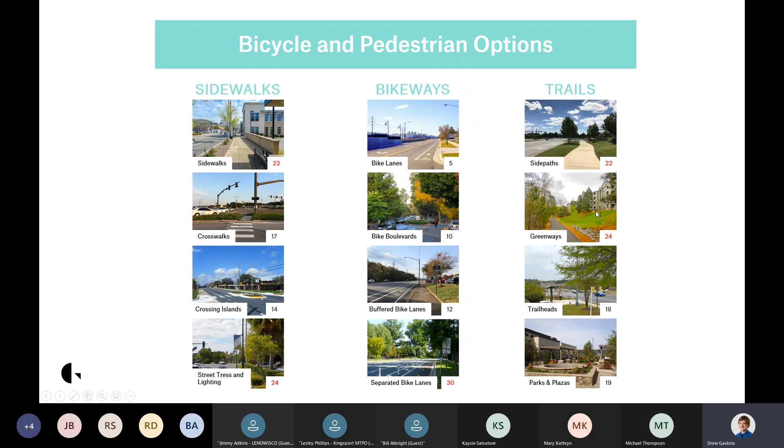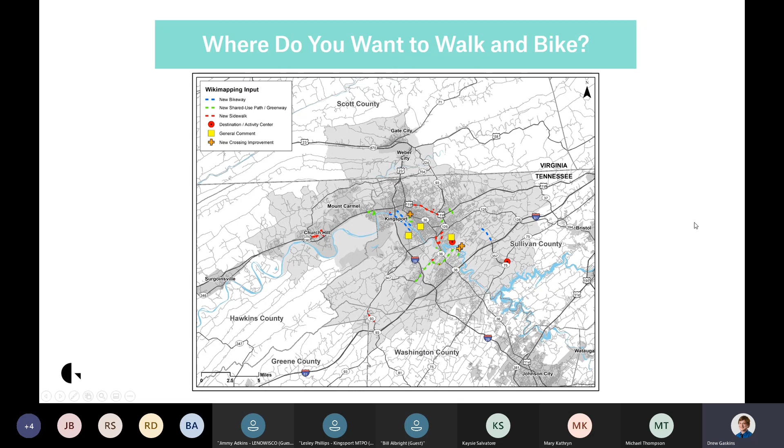And thank you so much if you got on the interactive map. If you didn't get the opportunity to do that in the first round, you still have the chance here. I'll get to that at the end of the presentation. Finally, that third question: key factors in transportation choice.

We got a lot of open-ended responses, really about a good Word document page's worth. So rather than going through those individually, we created a quick word cloud.

But to summarize generally, the four themes we saw were safety and accessibility, with people wanting to feel safe walking or bicycling, particularly along some of the major corridors.

Distance and comfort came up a lot. Again, people indicated they were more comfortable for those short trips, or would be more comfortable, if they had facilities available to them.

Connectivity, which was that new point of emphasis for the plan. And then I added a fourth theme, network continuity, which came up a lot but isn't captured as well in the word cloud, probably because people didn't use the word 'gap' much - talking about gaps in the network and the frustration they encounter when there's a small link in their trip that just isn't comfortable for them.

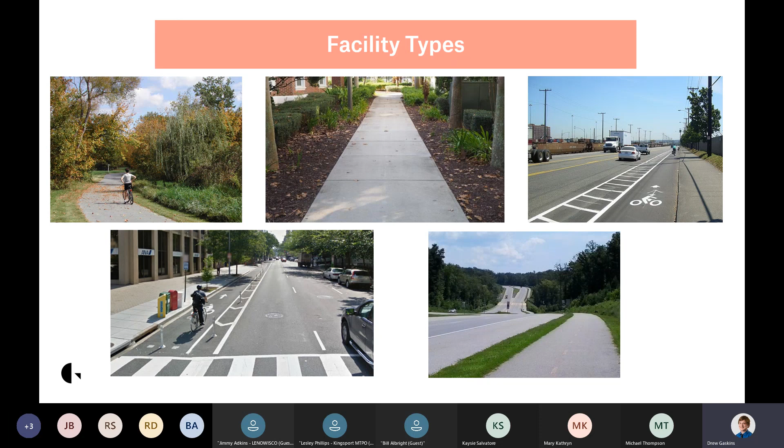But before I go over those networks, I did want to briefly touch on some of the facility types that we discuss, and you see some images here of what those are. In terms of dimensions, some of the categories we have are...

Shared use path and side path is one of our categories. A lot of times these are also called greenways, so this is what you'd associate with the Greenbelt, for example. The shared use path is a 10-foot path, completely separated from any type of vehicular traffic, really what we'd consider a classic greenway. On the right, a side path is essentially a greenway or shared use path that runs parallel to the road, providing a lot of separation from traffic as well. Based on my experience at Kingsport, I know there are some segments of the Greenbelt oriented that way, but that's what we mean by shared use path or side path.

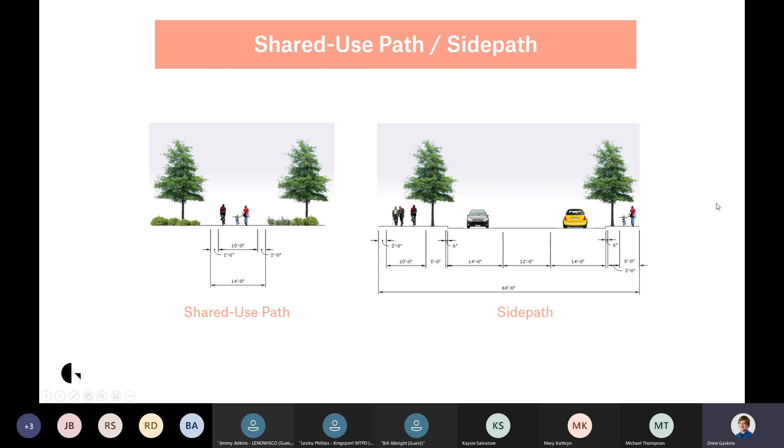Bike lanes, when you review the draft recommendations, currently just show up as a singular category. There are various configurations of bike lanes, and we expect to provide a little more specificity on those recommendations once we wrap up our look at feasibility.

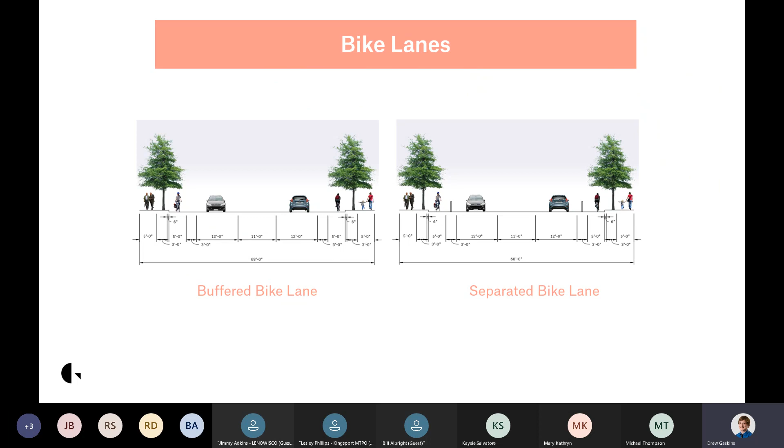Some other configurations that are a little more comfortable and provide more separation from traffic, which we showed in the survey, are the buffered bike lane. In this case, you've got your 5-foot bike lane, but with a 3-foot separation from traffic. Oftentimes that separation will just be pavement markings indicating that it's not an area for cars—it's not a travel lane, it's a buffer zone.

Separated bike lanes are essentially buffered bike lanes—you'll notice the little vertical separator in the figure. This is often accomplished using plastic bollards or anything to provide that psychological and physical separation from traffic.

Finally, at least in Tennessee, a less common but also widely used configuration is this separated bike lane, also known as a cycle track. In this case, you'd have two-way bicycle traffic on a single side of the street with some type of separation from traffic. So those are some of the various bike lane configurations that could be expected.

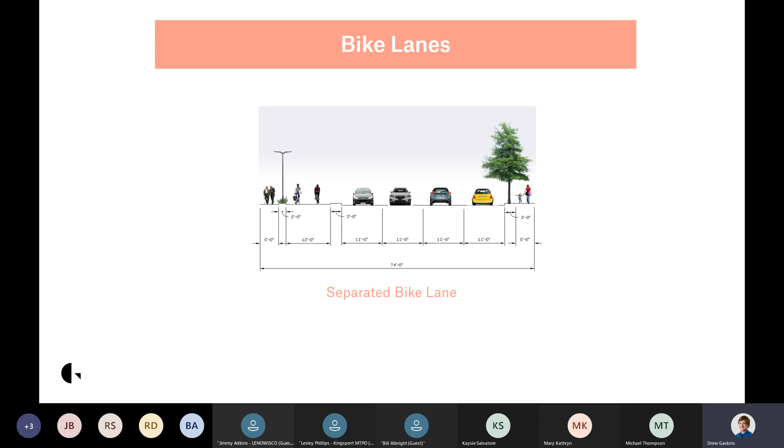We will identify areas where we think buffered or separated bike lanes could be appropriate. Those final decisions for facility types, though, would ultimately be made in the design process, once you've got an engineering level analysis of constraints on a specific roadway or project.

Another type of facility you'll see are paved shoulders—in this case, just a 6-foot paved shoulder. These facilities tend to be more appropriate and cost effective in more rural environments. So when we get to the network recommendations, you'll notice that in some cases we do transition out to paved shoulders as we get into more rural areas with much longer distances between origins and destinations.

And then finally, we do have some shared lane facilities as well. When we're talking about all ages and abilities facilities, shared lanes tend to be a choice of last resort, just because it means bicycles are going to be sharing the pavement with cars.

We want to emphasize that shared lanes aren't necessarily the classic Sharrow painting on the pavement. There are various treatments you can include, most of them traffic calming in nature. In neighborhood contexts, things like traffic circles, curb extensions, and bulb outs, which also work great in more urban contexts. Speed tables or cushions, I know those aren't always popular, but in certain contexts they can be effective. And of course your classic shared lane markings and signage, which when implemented aggressively and appropriately can help. These are some of the treatments that could be included on shared lane projects.

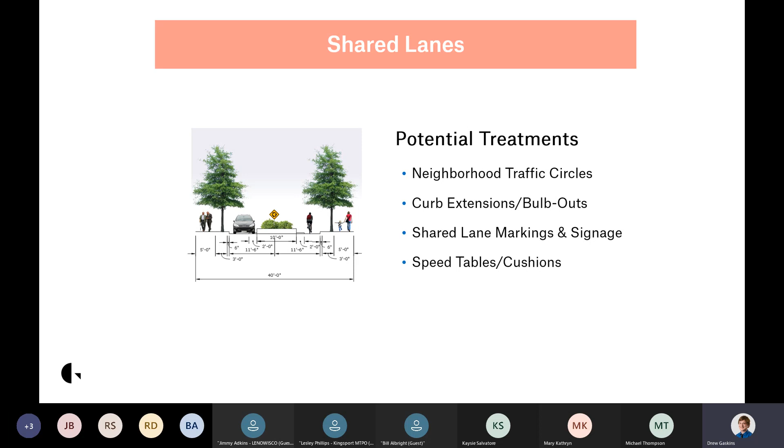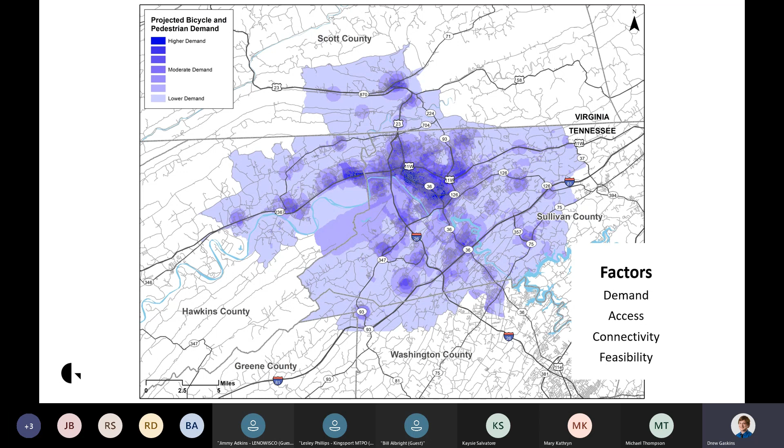Now that I've introduced the facility types, how did we develop the network updates? The factors that went into that were demand, access, trying to make sure these are accessible facilities close to where people would be able to get on them, and connectivity, which was a major point of emphasis in the plan. The last factor, which we're still wrapping up, is feasibility, making sure we're not presenting the MTPO with pie in the sky ideas that have no chance of actually being implemented. We want the recommendations to be realistic and implementable, with reasonable cost given the constraints.

To underscore the development of the draft bikeway network, we started, as I mentioned earlier, with the 2012 network from the 2012 plan. Many of those projects have been implemented, some have not, but that was really our starting point.

From there we went to the online interactive map and started layering on recommendations for this planning effort. We also built upon and leveraged the Greenbelt expansion recommendations identified in the Parks and Recreation master plan that the city of Kingsport recently presented. Anywhere we publish these recommendations, whether in this presentation, the online interactive map, or the final plan document, we'll make a distinction between our 2021 recommendations and those Parks and Recreation recommendations, and I'll show you what that looks like.

So again, we started with existing facilities, including a few implemented from the 2012 plan, then layered on updated recommendations that we've developed. Some of these are from the 2012 plan carried forward, and in other cases we extended or otherwise modified them.

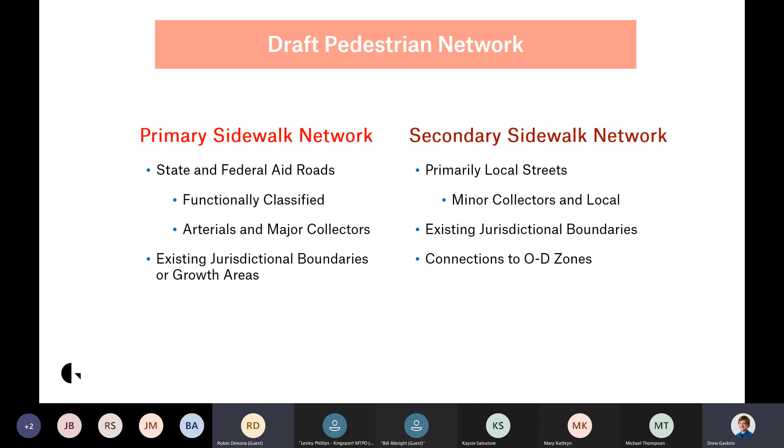Again, in terms of performance, pedestrian level of traffic stress, same deal. This is how fast your heart's beating when you're walking along some of these corridors. Pedestrian LTS tends to track very closely with whether or not there are sidewalks at all.

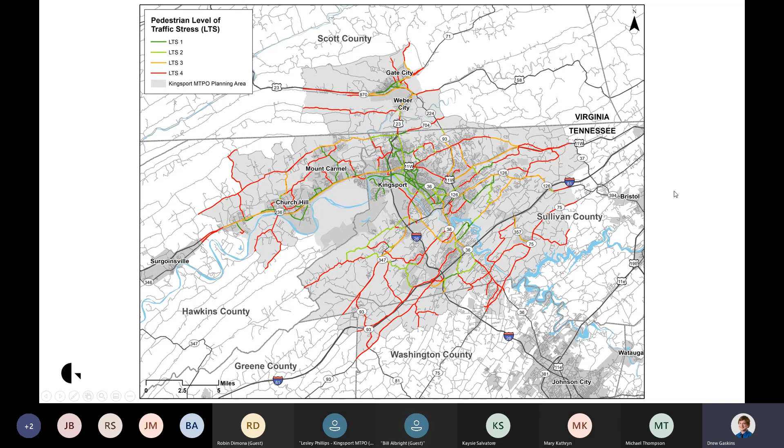All right, well, I guess that's a good segue into talking about ways that the public can get involved. So if there are questions or comments or thoughts that come up later, we do have a couple of different ways for you to get that information to us at a later time.

So you can zoom in - I know a lot of times people have specific areas of focus they want to look at. You can zoom into your neighborhood or near the school your child attends and take a look, and provide either linear or point comments for us. So jump on there even today, do it as soon as we're done, and let us know what you think. We'll be monitoring that over the next couple of weeks.

For those who may be more comfortable providing text comments or just suggestions, typing them out, there are a couple of ways you can do that as well. The first is the Facebook page. You can certainly post directly to the page if you like, or encourage your friends and family to do that. We'll also be distributing some prompts and topical posts over the next couple of weeks, so feel free to jump in the comments there and let us know your thoughts.